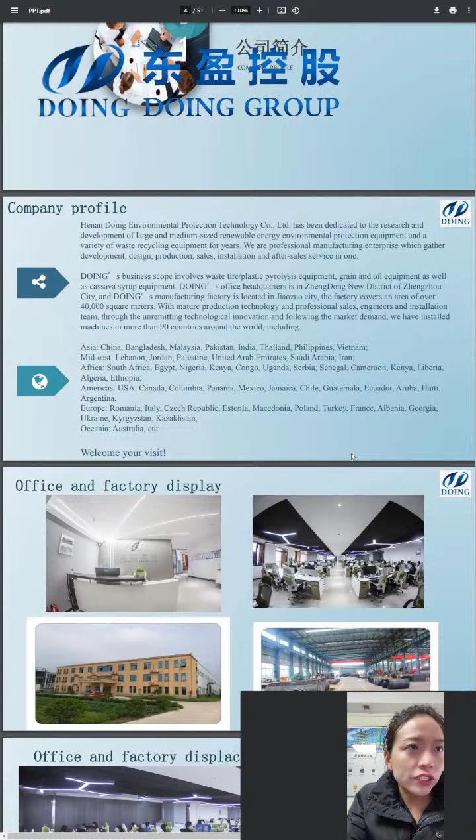We are a professional manufacturing enterprise which gathers development, design, development, design, production, sales, installation, and after-sales service in one. Our business scope involves tire and plastic pyrolysis plant, grain and oil equipment, as well as cassava equipment. Our head office is in Zhengzhou City, the capital city of Henan Province.

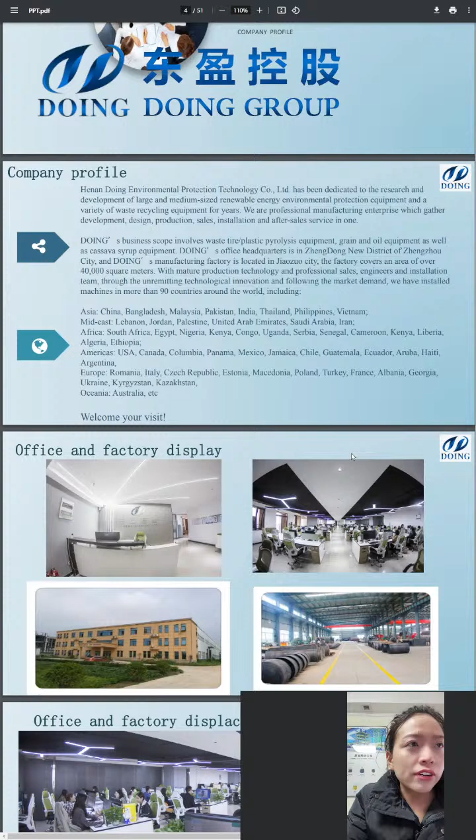It's in Zhengdong New District of Zhengzhou City, and Doing's manufacturing factory is located in Jiaozuo City. The factory covers an area of over 40,000 square meters. The whole manufacturing factory has mature production technology and professional sales engineers and installation team.

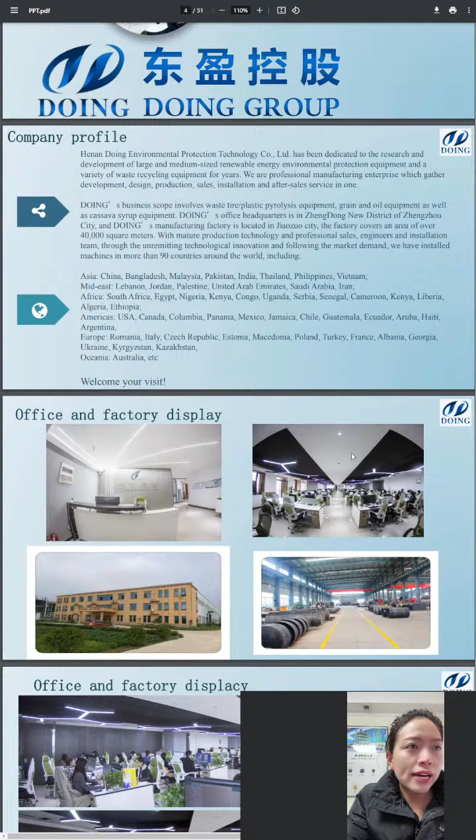Through technological innovation and following market demands, we have installed machines in different countries around the world. So till now, more than 90 countries have our projects, including Asia, Middle East, Africa, Americas, Europe.

Last year we set up a branch office in Nigeria, so you can see the market in African countries like Egypt, Nigeria, Kenya, Congo, Uganda, Serbia, Cameroon, Liberia, etc. Last year we opened a new branch office in Nigeria, so it's helpful for our foreign customers, especially for African customers.

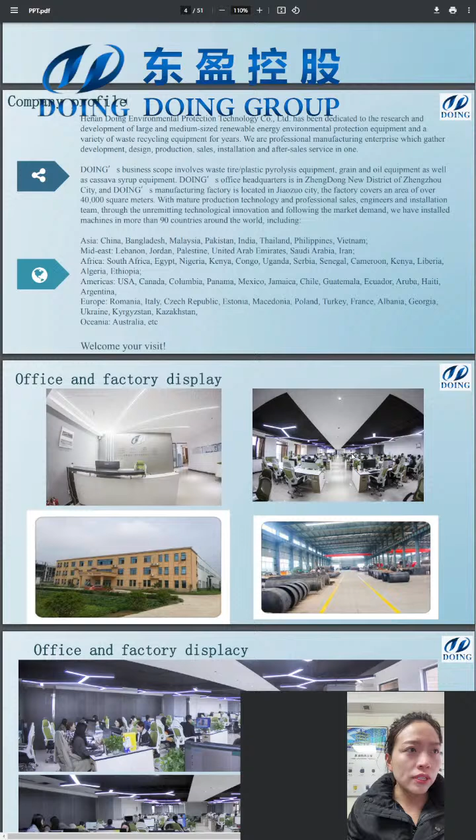So do you remember which city we are located in? Yes, we are in Zhengzhou City, the capital city of Henan Province. So it's very convenient to visit our company and our manufacturing factory. Welcome your visit.

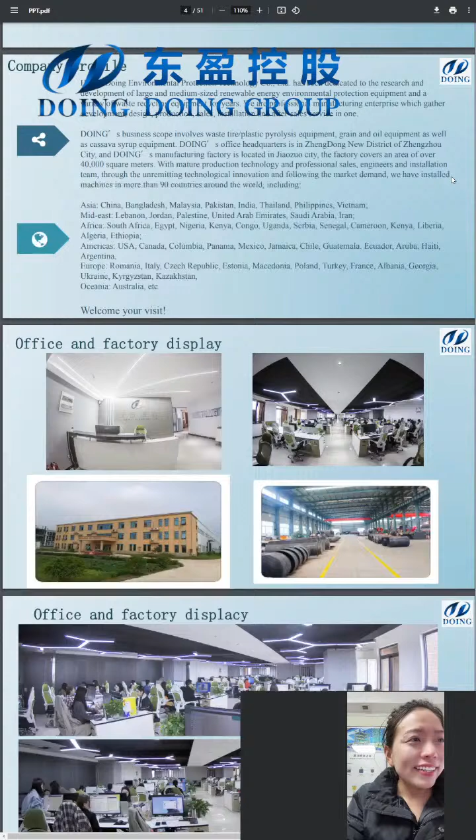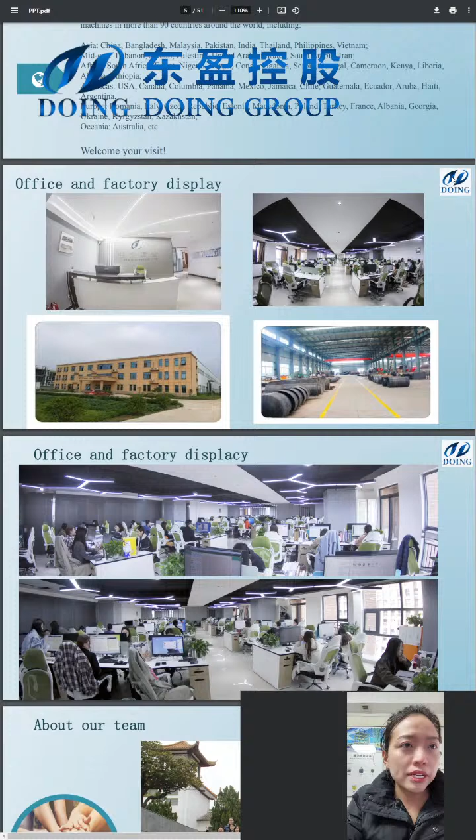Here we can see our office and factory. In our company, more than 100 staff work in different departments, like sales department, after sales department, engineering team, financial department, and management.

Our manufacturing factory is located in Jiaozuo City. It's not far from our office. Welcome your visit - when you visit us, we will show you around our company and pick you up to our manufacturing factory to see what machines we are providing and let you inspect the manufacturing quality in person.

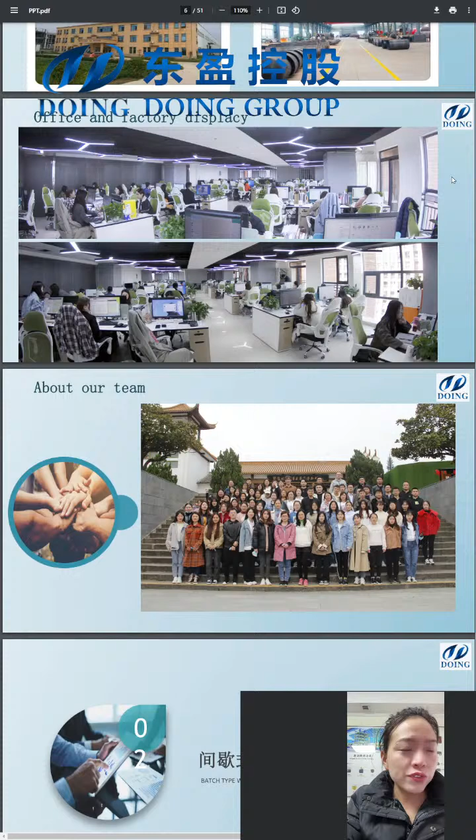In our company, there is not only work. We will enjoy ourselves in the spare time.

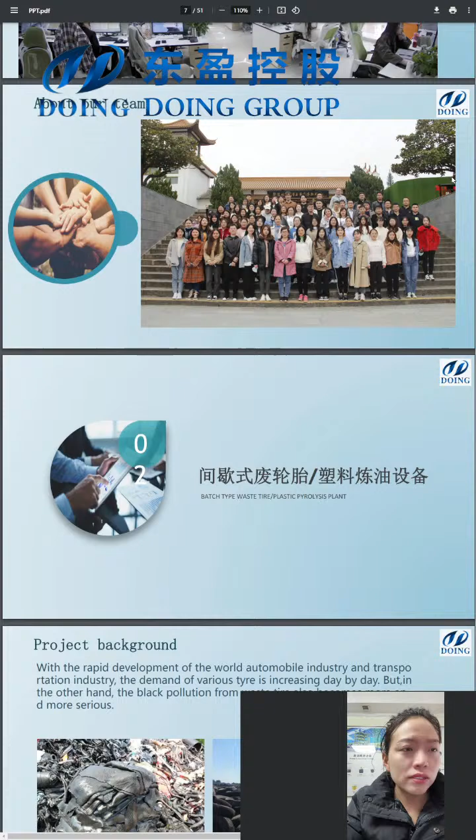Now for the main topic of this live stream: what machines we are providing and the purchase options for tire pyrolysis plant. If you research this tire recycling project, you may know some solutions or different designs of pyrolysis plant. It mainly includes 3 designs.

First one is the batch type tire pyrolysis plant. The second one is the semi-continuous pyrolysis plant. The last one is the fully continuous pyrolysis plant. For now, we are providing these 3 designs for different customers.

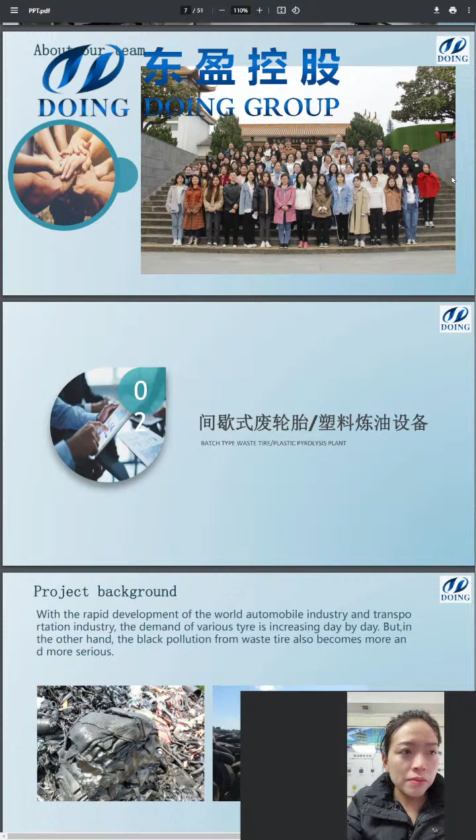If the customer's daily capacity is not very large and it's the first time for them to venture into this project, the most widely used design is the batch type. If the capacity is larger, they may choose the semi-continuous or fully continuous system.

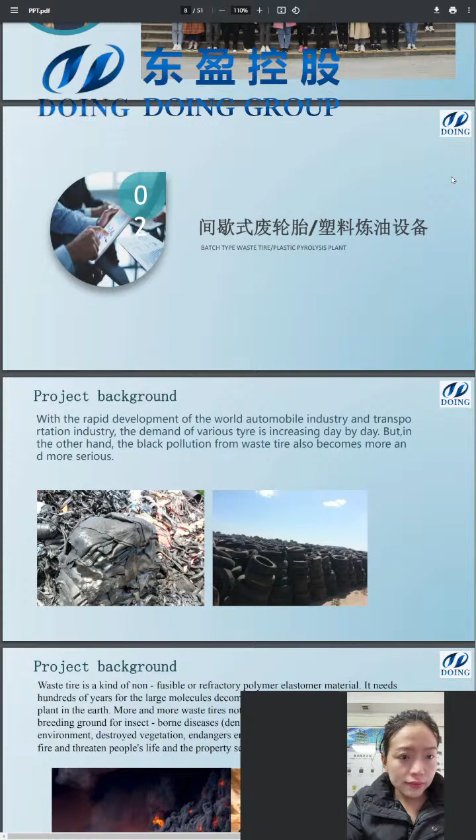Let's see the project background. With the rapid development of the world automobile industry and transportation industry, the demand for various tires is increasing day by day. But on the other hand, the black pollution from waste tires also becomes more and more serious.

So in some countries like South Africa, many customers feedback to us that countless waste tires are waiting for recycling, and they want to find a solution to dispose of the waste tire problem. That's why we appeared.

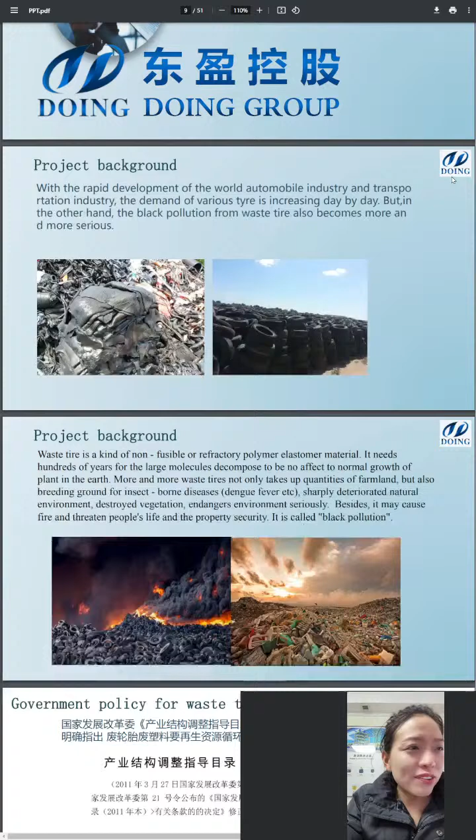The project background: waste tire is a kind of refractory polymer material. It needs hundreds of years to decompose to have no effect on normal growth of plants in the earth.

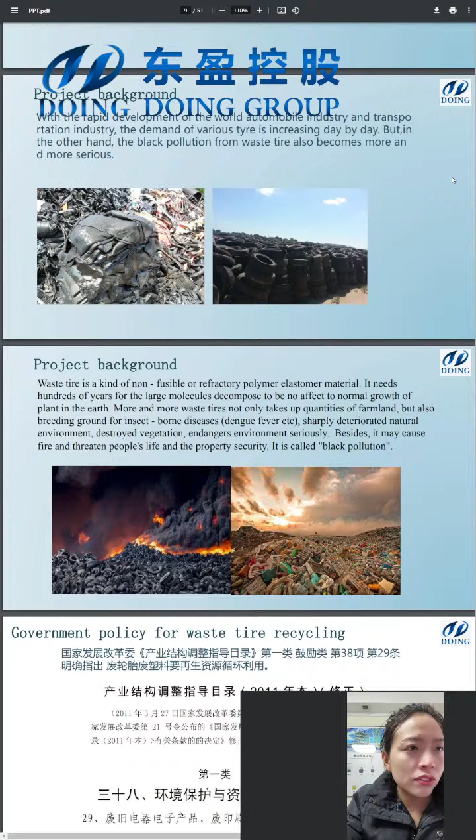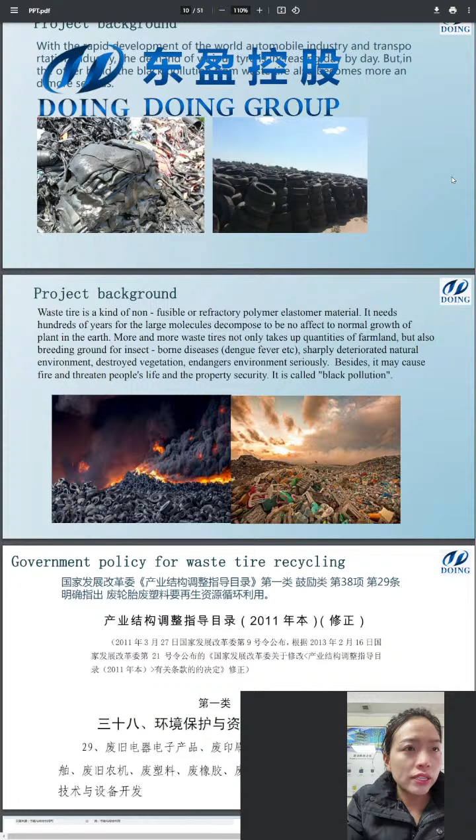More and more waste tires not only take a quantity of farmland, but also become breeding ground for insect-borne diseases, harming the natural environment. It will destroy nature and our life. It's a dangerous environment, seriously, and it may cause fire and threaten people's life and property security. That's why it is called black pollution.

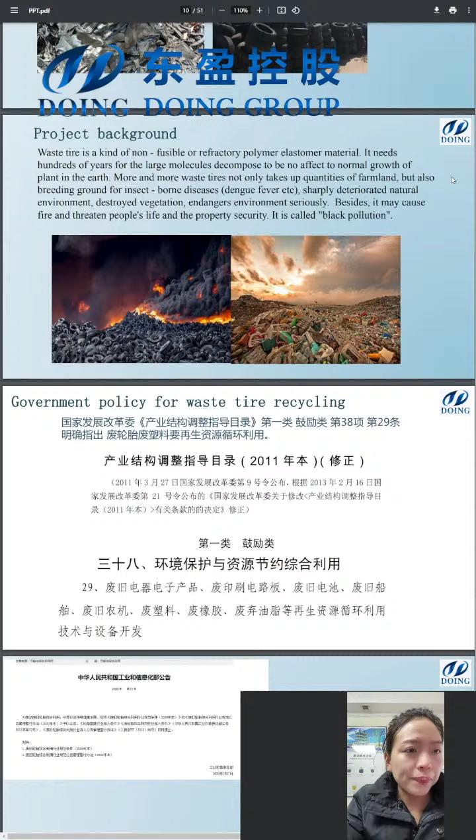Due to this problem, many countries have introduced different solutions to encourage people or enterprises to recycle waste tires properly. Like China - the Chinese government is encouraging enterprises to recycle, to do the waste tire and plastic pyrolysis project.

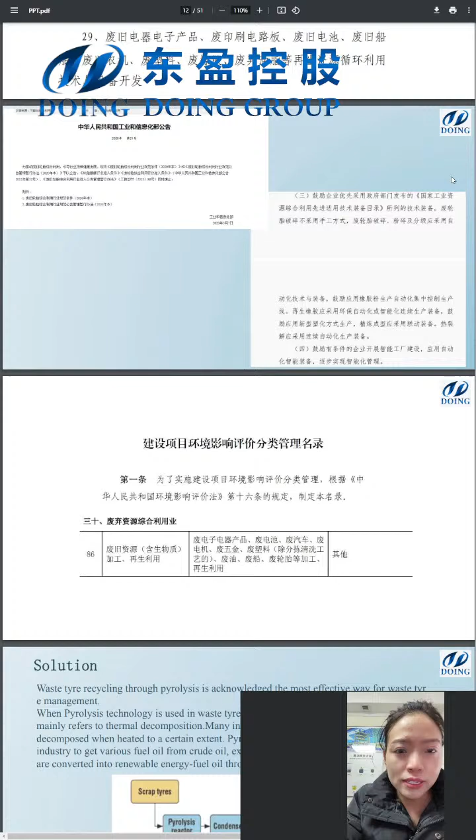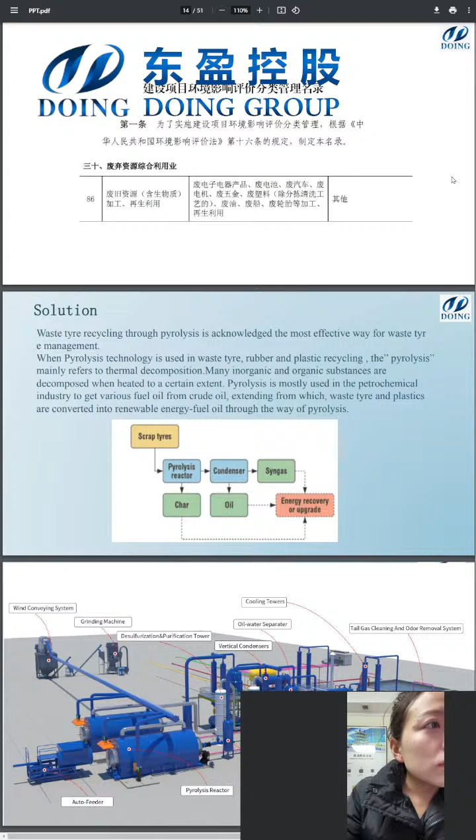Facing the waste tire problem, there are solutions. Waste tire recycling through pyrolysis is acknowledged as the most effective way for waste tire management. When pyrolysis technology is used in waste tire, rubber, and plastic recycling, the pyrolysis mainly refers to thermal decomposition - many organic substances are decomposed when heated to a certain extent.

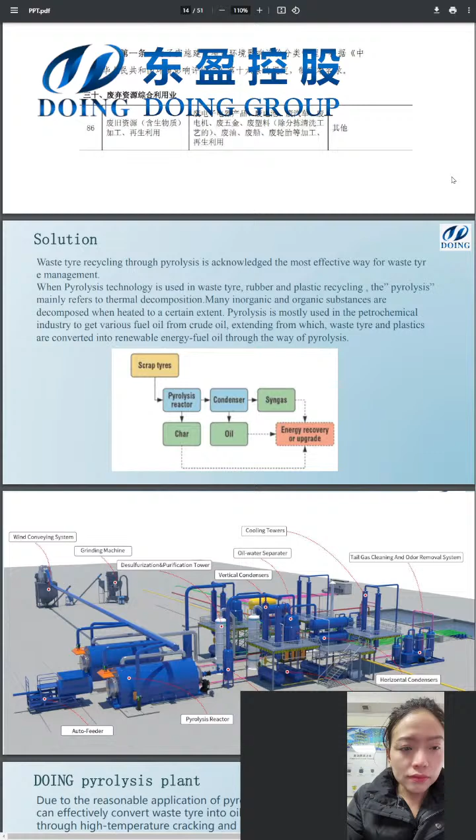Pyrolysis is mostly used in the petrochemical industry to get various fuel oil from crude oil, extending to where waste tire and plastic are converted into renewable energy fuel oil through the way of pyrolysis. In one word, waste tire pyrolysis plant can convert waste tire, plastic, and solid waste like this into fuel oil, converting waste to renewable fuel.

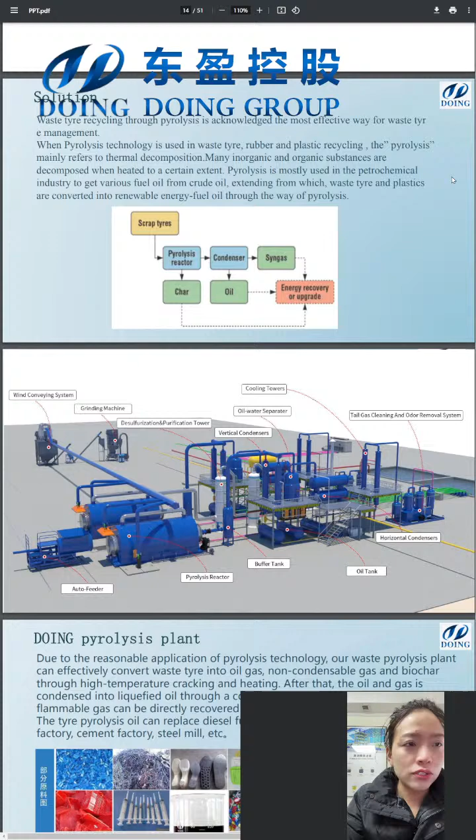Let's see the 3D flowchart of the batch design. As you know, we have three designs of pyrolysis plant: batch, semi-continuous, and fully continuous. Let's see one by one. Firstly is the batch.

Batch type is more suitable for smaller capacity. The minimum capacity is just very small, just 100 kilogram. Larger, there are 500 kilogram, 1 ton per day, 3 ton per day, 5 ton per day. And the industrial scale is 10 ton per day, 12 ton per day, 15 ton per day.

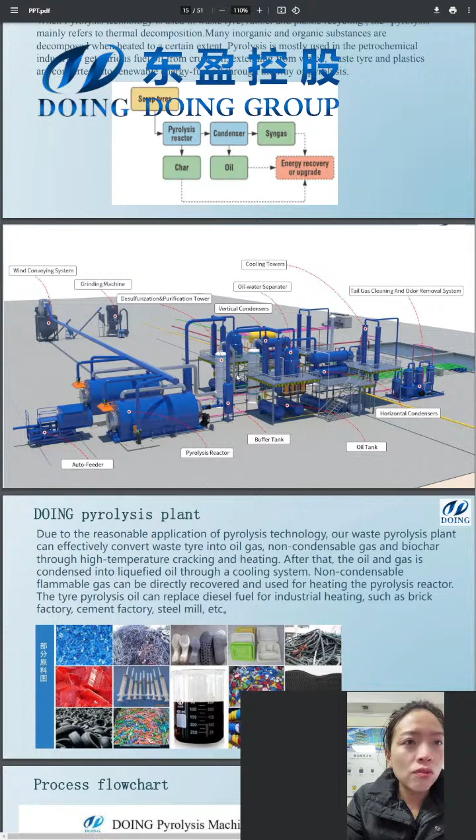And that's the 2 parts of the batch pyrolysis plant. Actually, the principle of a pyrolysis plant is a little similar, but the different designs have different technology and principle. This one is the batch type.

If customers' daily processing capacity is larger, like 20 ton per day or 25 ton per day, and they want a higher automatic degree but don't want to put a lot of investment into this project, the semi-continuous device is more suitable. Semi-continuous plant is more advanced than the batch, but cheaper than the fully continuous plant.

And the characteristic of the semi-continuous plant is the carbon black can be discharged at a high temperature. If you researched this pyrolysis project before, you may know for a batch design, before you do the carbon black discharging, you need to wait for the reactor to cool down. It will take 3 to 4 hours even with our latest batch pyrolysis plant.

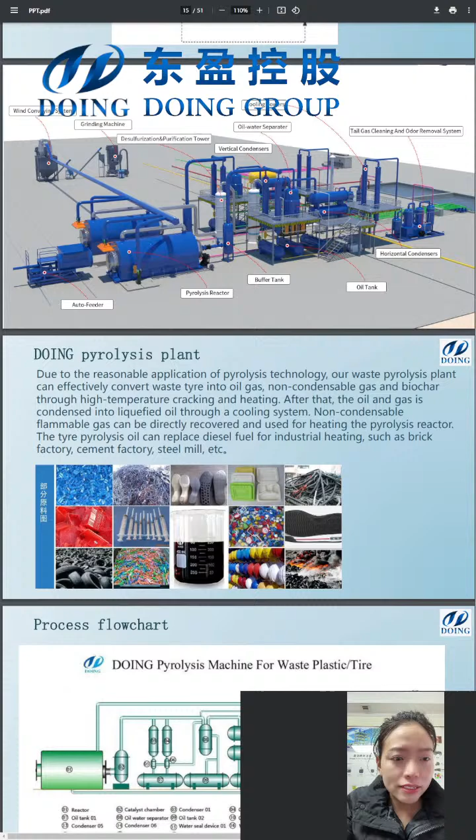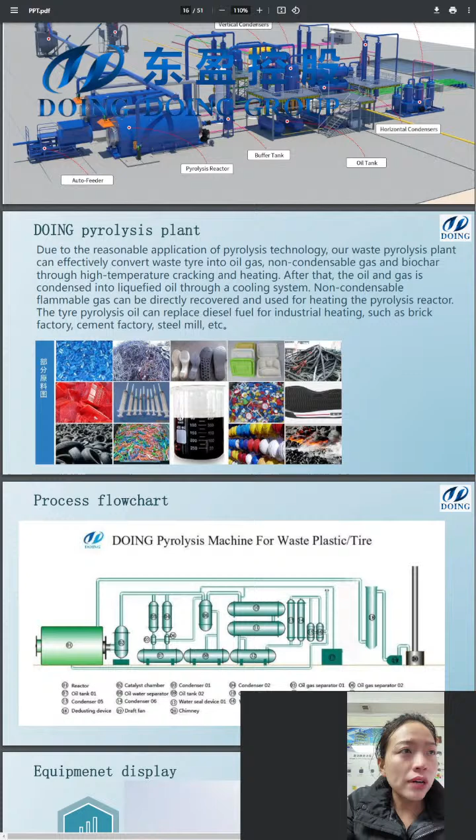Let's see what kind of material can be processed by the pyrolysis plant. Due to the reasonable application of pyrolysis technology, our waste pyrolysis plant can effectively convert waste tire into oil gas, non-condensable gas, and biochar through high temperature cracking and heating. So you will get four kinds of byproduct from waste tire. First one is the oil, fuel oil, the liquid oil.

The second one is the steel wire. Third one is the biochar or the carbon black powder. Fourth one is the non-condensable syngas. It's recycled to heat the furnace directly.

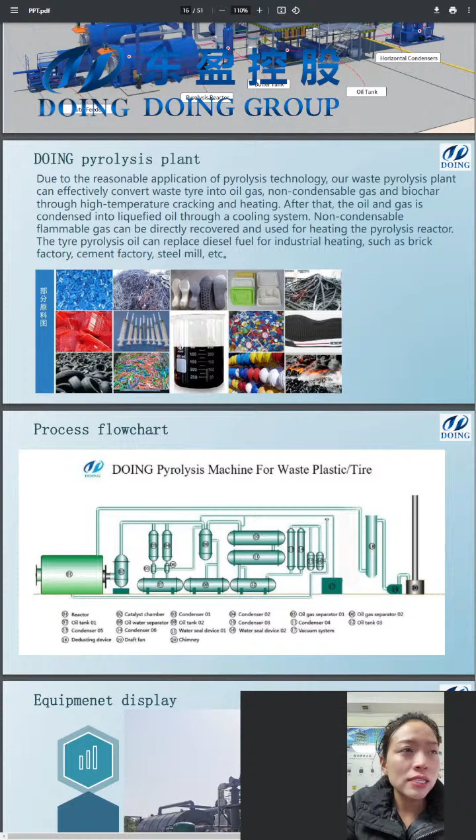After that, the oil gas is condensed into liquid oil through a cooling system. Non-condensable syngas can be directly recovered and used for heating the pyrolysis reactor. The tire pyrolysis oil can replace diesel fuel for industrial heating, such as brick factory, cement factory, steel mill, etc.

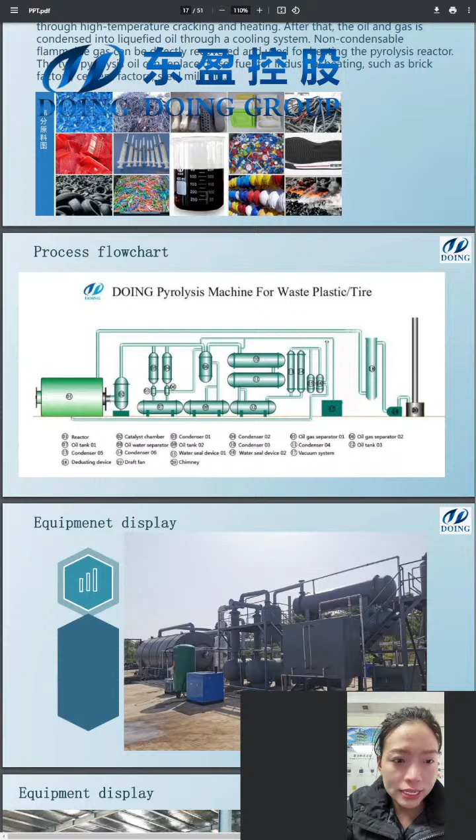It's the installation site.

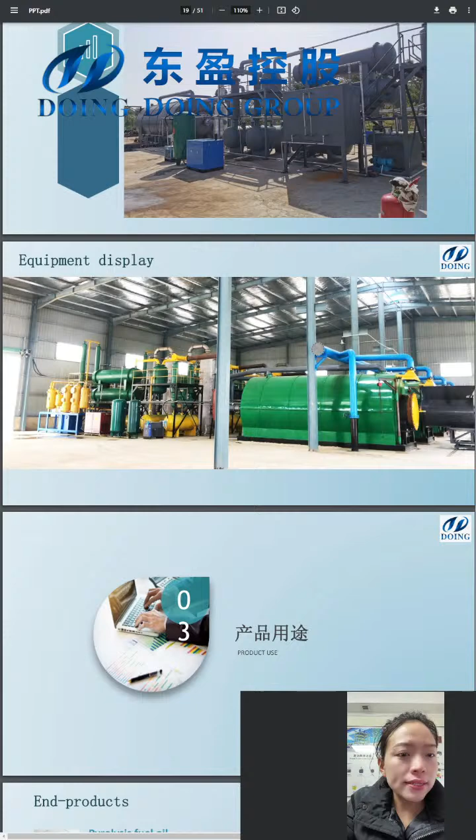Equipment display. This is one of the running sites in China. The Chinese emission standards are very strict, similar to the European standards.

To help customers reach such emission standards, we will suggest they use environmentally friendly devices like the vacuum system, automatic feeder to improve feeding efficiency, and smell disposal system to dispose of the smell of the syngas. After purification, the syngas is recovered and used for the pyrolysis reactor, as well as the desulfurization tower, which is used to remove the sulfur content of the flue gas after heating.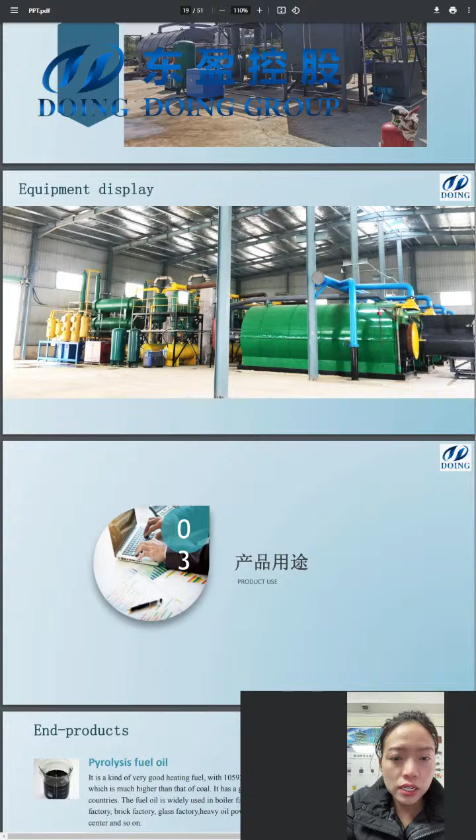Let's see the product use. Do you remember how many kinds of product you will get from tire pyrolysis? The end products are...

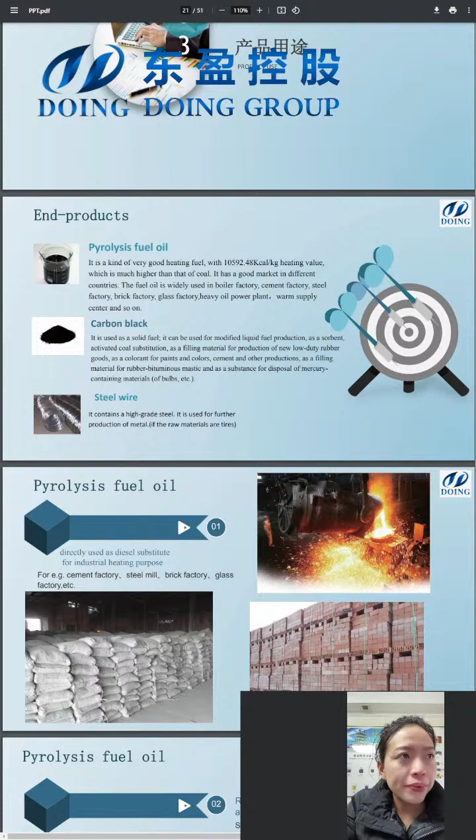First one is pyrolysis fuel oil. It's a very good heating fuel with more than 10,000 kcal per kg heating value, much higher than coal. It has a good market in different countries. The fuel oil is widely used in boiler factories, cement factories, steel factories, brick factories, glass factories, heavy oil power plants, warm supply centers, and so on. So it's one of the main products from a waste tire pyrolysis plant.

The second one is carbon black. Maybe some customers are confused about its use. They ask how they can use the carbon black or where they will sell it.

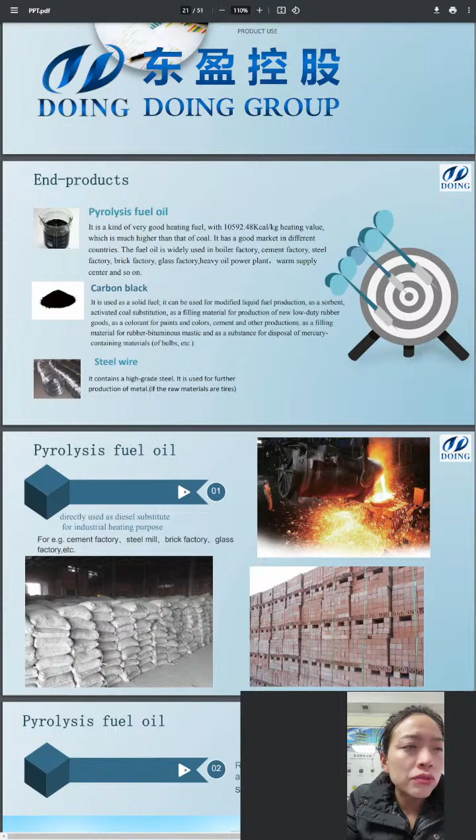It's used as a solid fuel. It can be used for modified liquid fuel production as a sorbent, activated coal substitution as a filling material for production of low-duty rubber goods, to make paints and colors, cement, and other products as a filling material for rubber-bituminous mastic, and as a substance for disposal of mercury-containing material.

As we know, from the waste tire pyrolysis project, the carbon black you get is in powder form. Maybe some customers are curious about its market. In China and India, the selling price of crude carbon black powder is not very high, so more and more customers want it to be more valuable.

So there are some solutions to process it further. If you want to make it into solid fuel, we can provide customers with the briquette machine. This machine can make the carbon black powder into pellets, so it can be transported and packed easily.

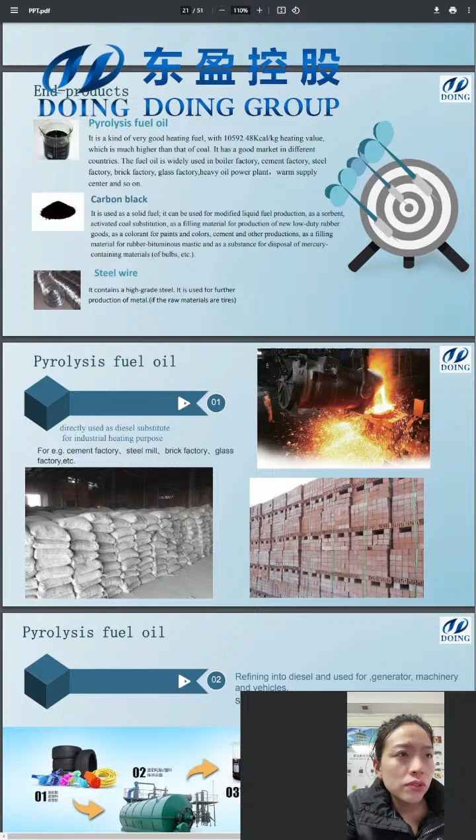So if your raw material is tires, you can get 3 kinds of byproducts: pyrolysis oil, carbon black powder, and steel wire. If you want to sell the steel wire at a better price, you can choose to remove the steel wire before feeding, so it will be of a higher grade.

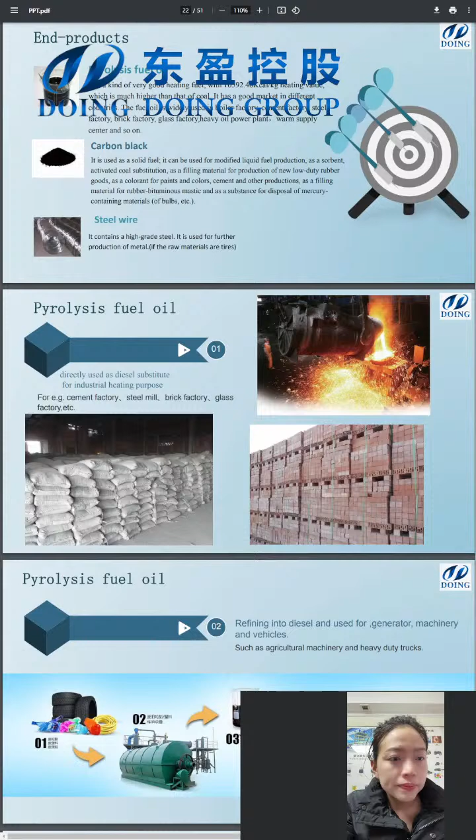Please see the pyrolysis fuel oil. It can be directly used as a diesel substitute for industrial heating purposes. Let's see where you can sell it: cement factories, steel mills, brick factories, glass factories, etc. So you can find industrial factories that use diesel fuel for heating, and sell the pyrolysis oil to them.

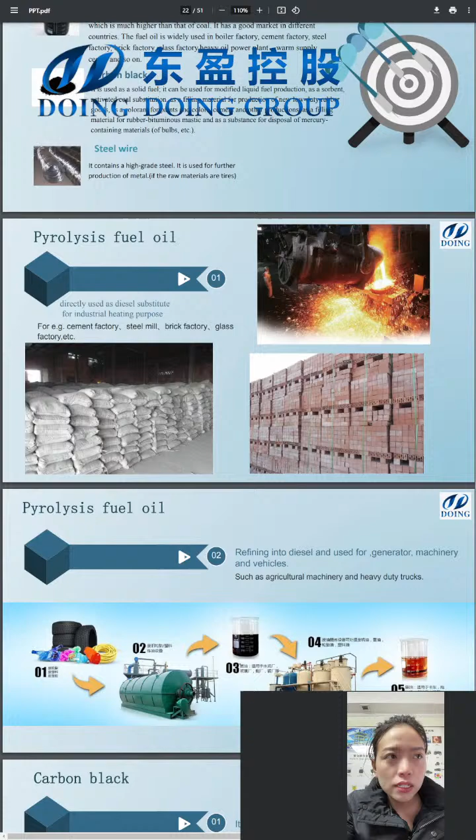There is also another way for the pyrolysis fuel oil market. The first one is you can directly sell it. The second one is you can choose to refine it.

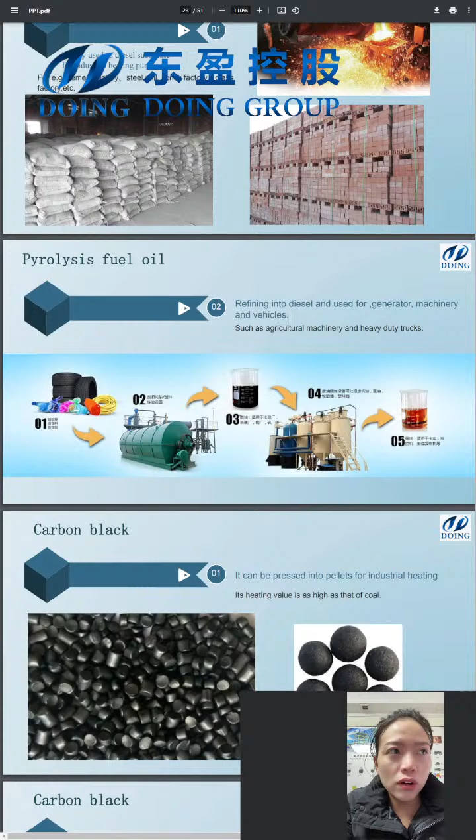Our company can provide not only the pyrolysis plant, but also the distillation unit. It can refine the tire pyrolysis fuel oil into diesel, and after this process, the diesel fuel can be used for diesel generators and diesel vehicles, such as heavy-duty trucks, agricultural machinery, like mining machines. After both the pyrolysis process and the distillation process, you will get diesel fuel. So that's the second solution to treat the tire pyrolysis oil.

After seeing the function of pyrolysis oil, let's see the function of carbon black, or how do we treat carbon black from the tire pyrolysis plant.

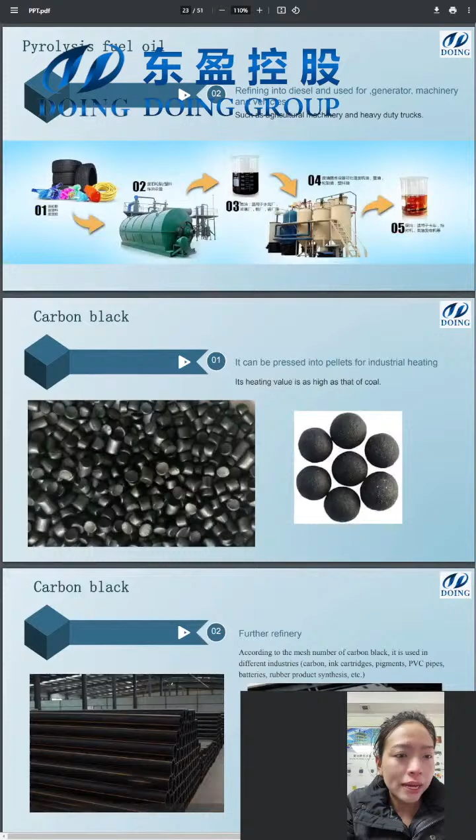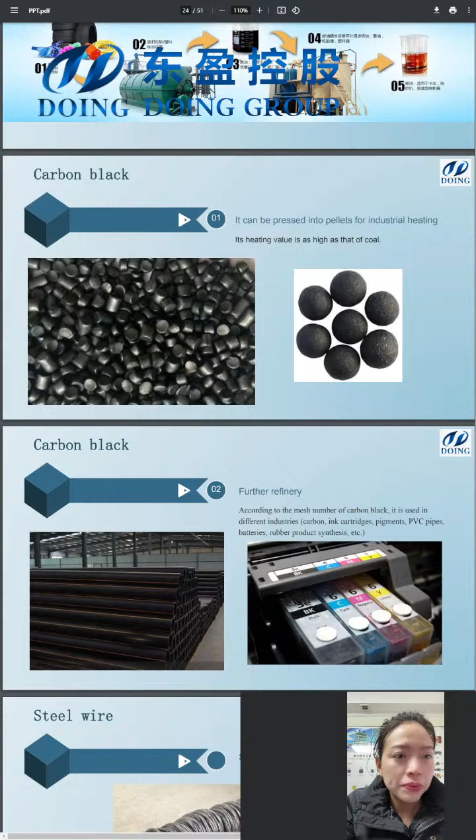The first one is, as I introduced to you just now, it can be pressed into pellets for industrial heating. Its heating value is as high as that of coal. In pellet form, it is easy to burn, easy to transport and to sell in the market, and it can be regarded as a substitute for coal.

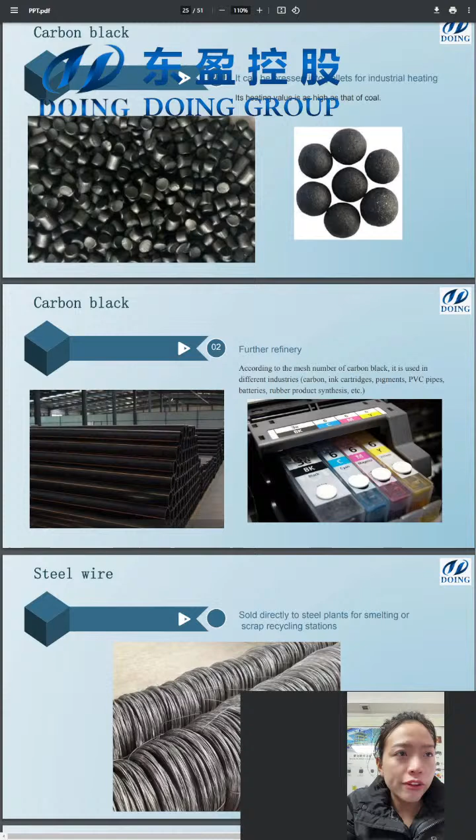The second way is further refinery. According to the mesh number of carbon black, it is used in different industries, like carbon, ink, pigments, PVC pipes, battery, rubber products, etc. In these industries, carbon black is very important.

So if you are new to this project and you don't know how to find the market, you can refer to this introduction and look into these industries to see if they need such products from the waste tire pyrolysis project.

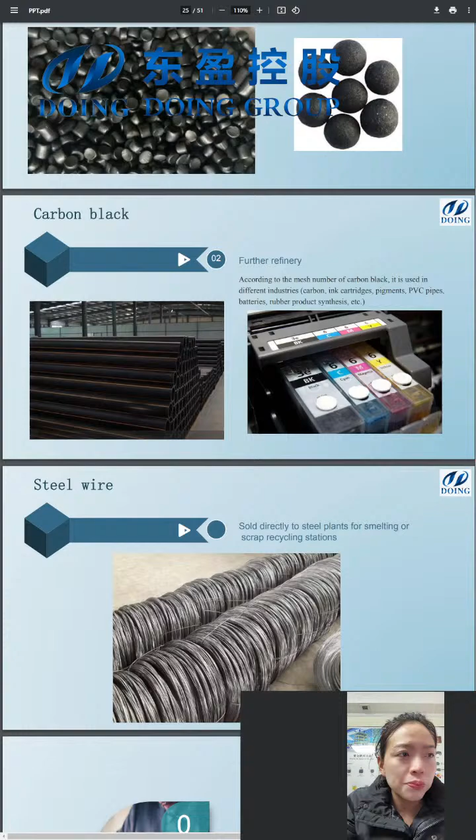The third one is steel wire. Steel wire can be sold directly to steel plants for smelting or to scrap recycling stations. And if you would like to get a higher grade steel wire, you can use the steel wire separator to remove the steel wire inside the reactor with the tire. In this way, without extra heating, the steel wire quality is better.

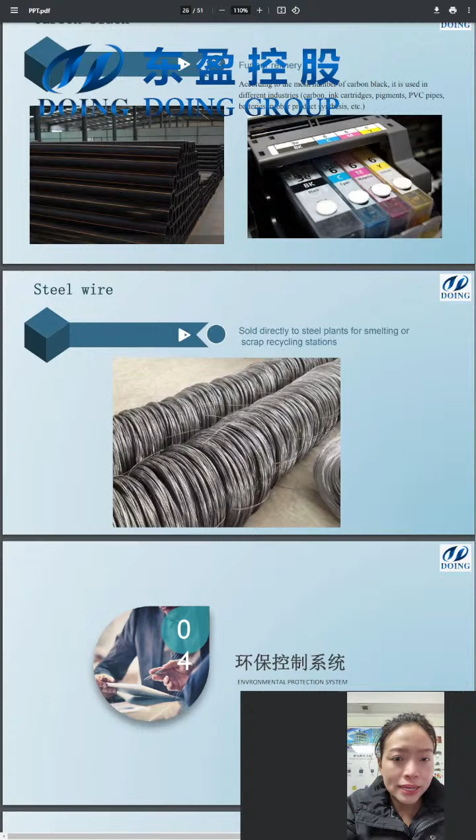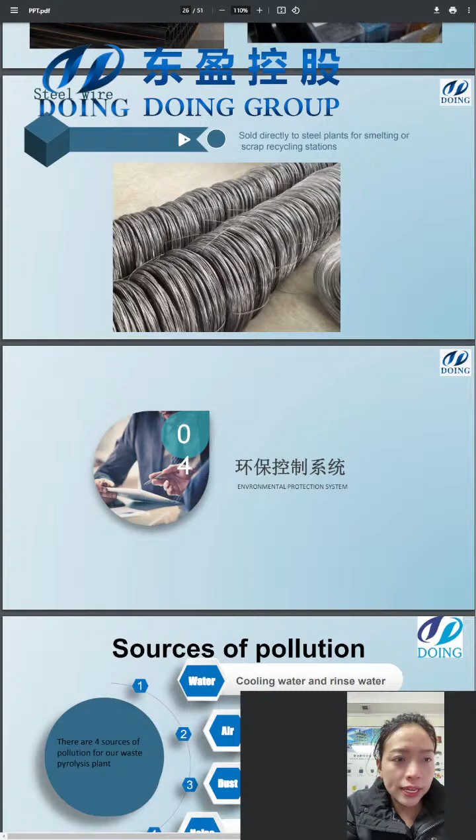After seeing the functions of the byproducts from waste tire pyrolysis plants, let's see how we achieve a higher degree of environmental protection, and in which aspects we can help customers get better and higher emission standards.

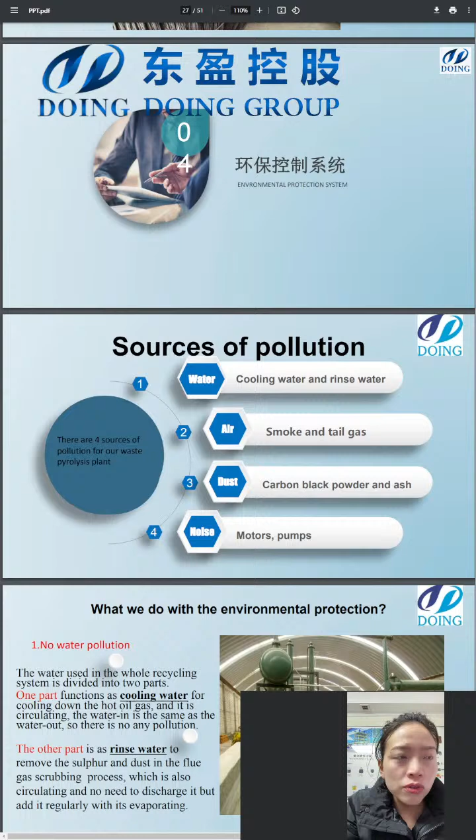Maybe some customers want to ask how do you guarantee this plant has no pollution, and how do you solve the pollution problems? Firstly, we must know the source of pollution and what aspects would cause pollution issues.

There are 4 sources of pollution for our waste pyrolysis plant. The first one is water, the second is air, the third is dust, and the fourth is noise. Let's analyze them one by one.

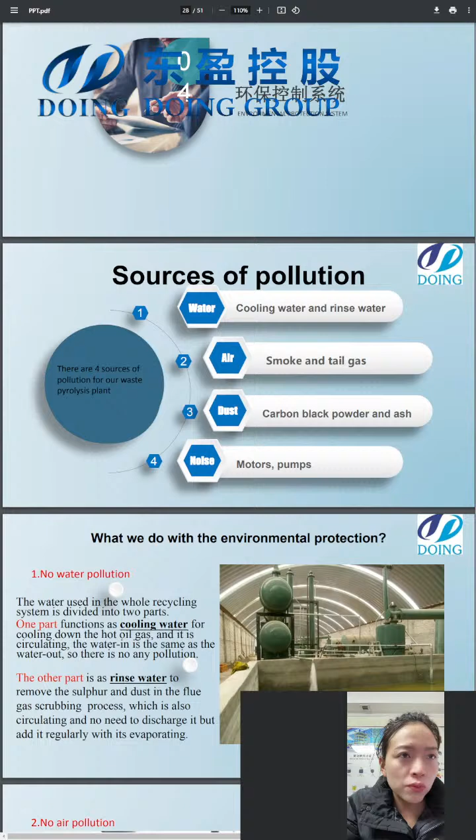Water: in Doing's pyrolysis plant, the water used contains 2 kinds. One is cooling water, the other is rinsing water. And we tell customers our plant is without water pollution.

Let's see why. The water used in the whole recycling system is divided into 2 parts. One part functions as cooling water for cooling down the hot oil gas, and it is recycling, it's circulating. The water in is the same as the water out, so there is no pollution - that's the cooling water. The second water is the rinse water, used to remove the sulfur and dust in the flue gas scrubbing process, which is also circulating and doesn't need to be discarded, just added regularly as it evaporates. So you can see there is no water pollution.

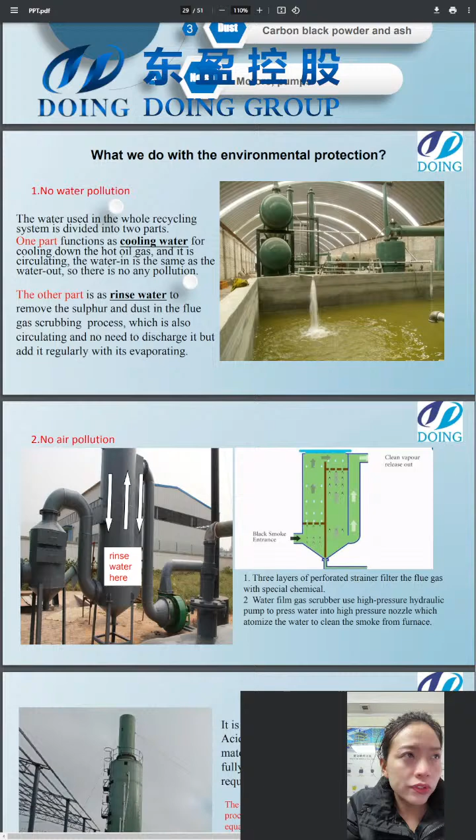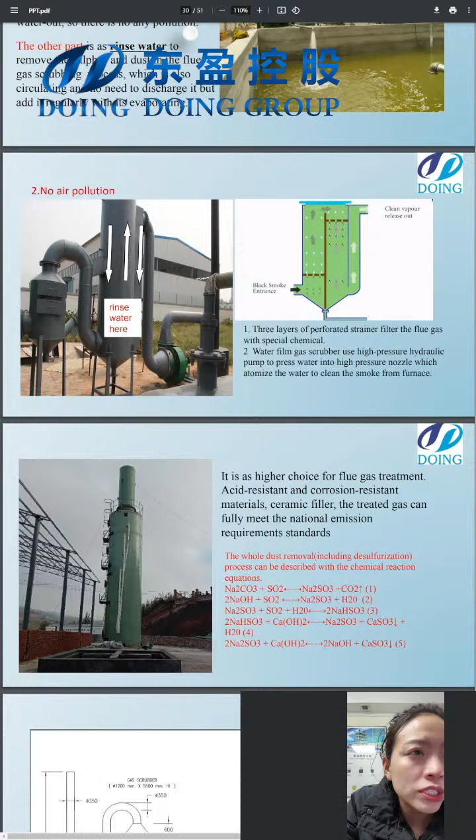Second one is the air. Let's see why there is no air pollution. Firstly, there are 3 layers of screens that filter the flue gas with special chemicals, and the water film gas scrubber uses a high pressure hydraulic pump to press water into a high pressure nozzle, which atomizes the water to clean the smoke from the furnace.

It's the basic configuration. If you are located in African countries and you don't need to care about emission standards very strictly, this configuration is okay, it is enough to reach the emission standards.

But if you are located in a country with higher and more strict requirements on emissions, or you want a more environmentally protective device, you can use this higher configuration: the FRP desulfurization tower. It is a higher choice for flue gas treatment, with acid resistance and corrosion resistant material, using ceramic filler.

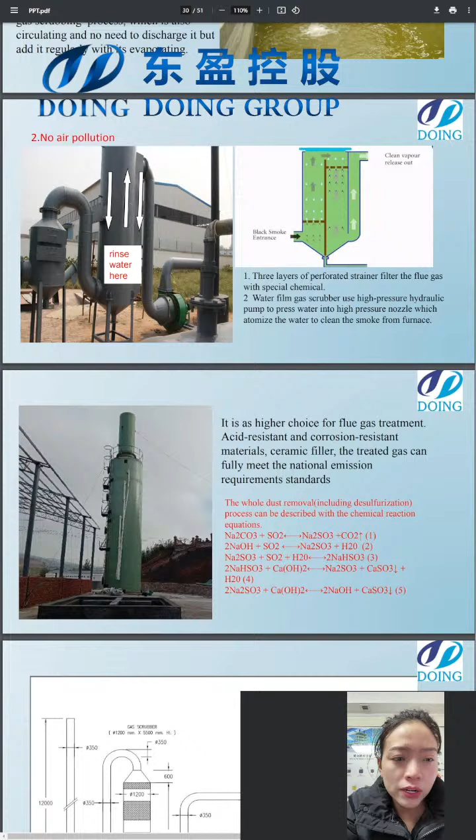The treated gas can fully meet the national emission requirement standards. Not only can it meet the national emission standards, it can also reach the European, USA, and other countries' very strict emission standards.

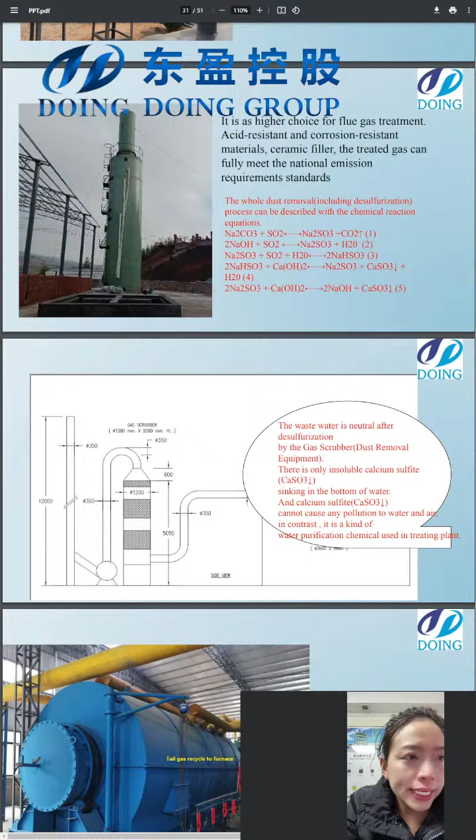If you are familiar with pyrolysis or with the chemical industry, you can understand the chemical reactions involved, so please have a look roughly - it's the structure inside the scrubber. By using special chemicals to remove the sulfur content of the flue gas, after purification, the flue gas can be discharged, can be emitted to reach the standards.

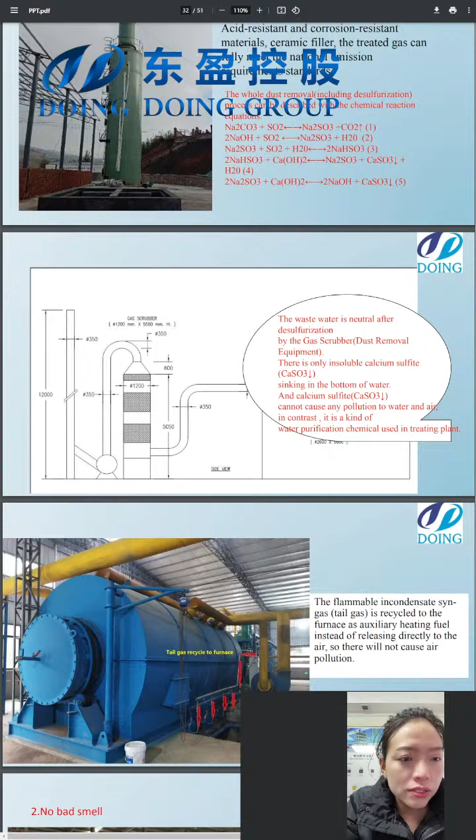The tail gas is recycled to the furnace as auxiliary heating fuel instead of releasing directly to the air, so there won't cause air pollution.

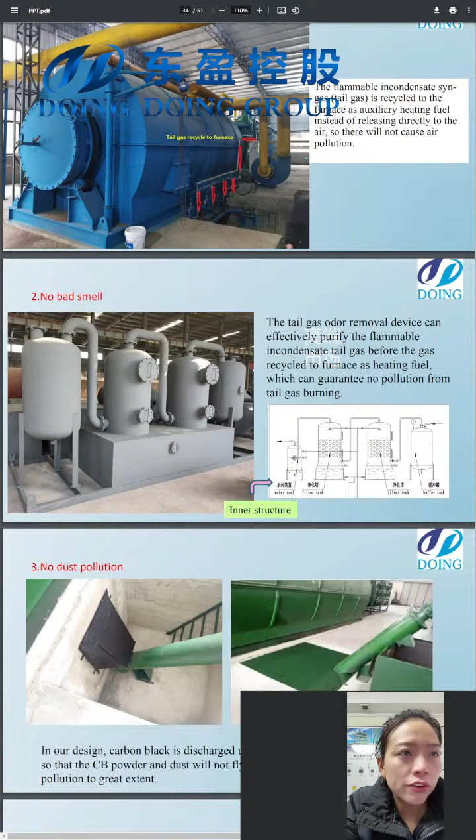Let's see the smell, how to dispose of the smell in the flue gas and the tail gas. It is one of our patent products. The tail gas odor removal device can effectively purify the tail gas before the gas is recycled to the furnace as heating fuel, which can guarantee none of the pollution from tail gas burning.

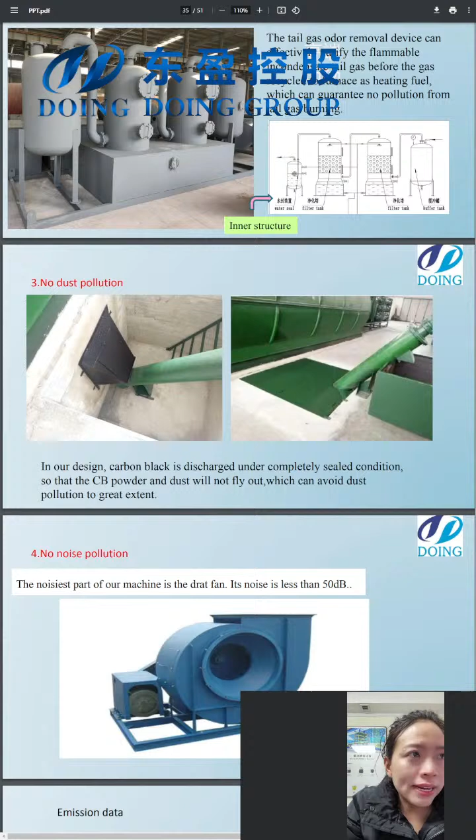It's the gas problem. Let's see the dust problem. As we can see, the carbon black, this photo is for the carbon black discharging process of the batch device. In our design, carbon black is discharged under completely sealed condition, so that the carbon black powder and dust won't fly out, which can avoid dust pollution to a great extent.

It is the design of the batch system. If you choose the semi-continuous or fully continuous plant, that's why we say these two designs are much more costly than the batch device. The one of the biggest differences is the carbon black discharging process.

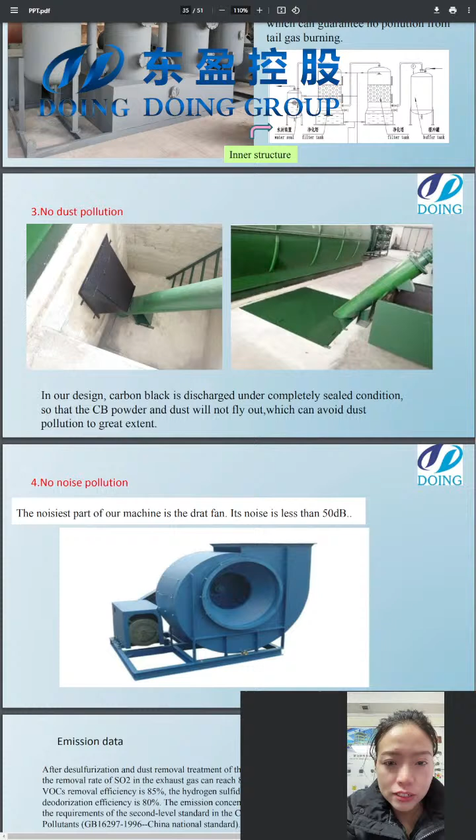In the semi-continuous and fully continuous pyrolysis plant, the carbon black will be discharged by the discharging conveyor. All the conveyors are sealed, and no matter the feeding process or the carbon black discharging process, the powder form is in a completely sealed condition, so as to avoid the dust flying situation.

So we analyze the dust pollution, what we do to prevent the dust problem.

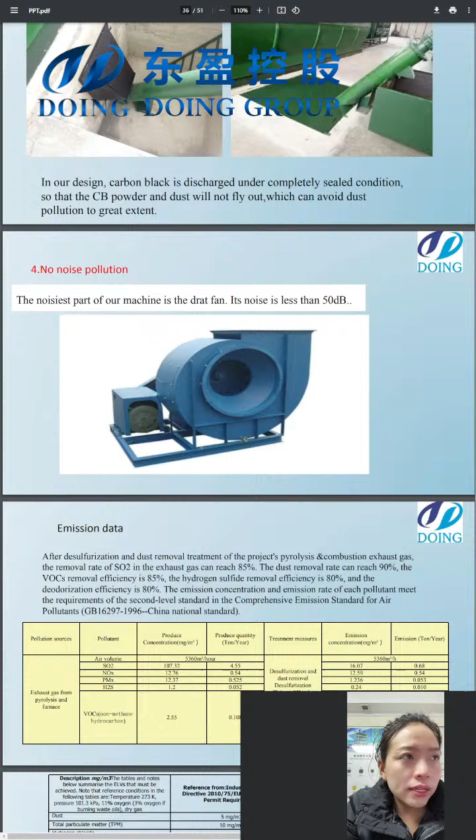And the last one is noise pollution. The noisiest part of our pyrolysis plant is the draft fan, its noise is less than 50 dB.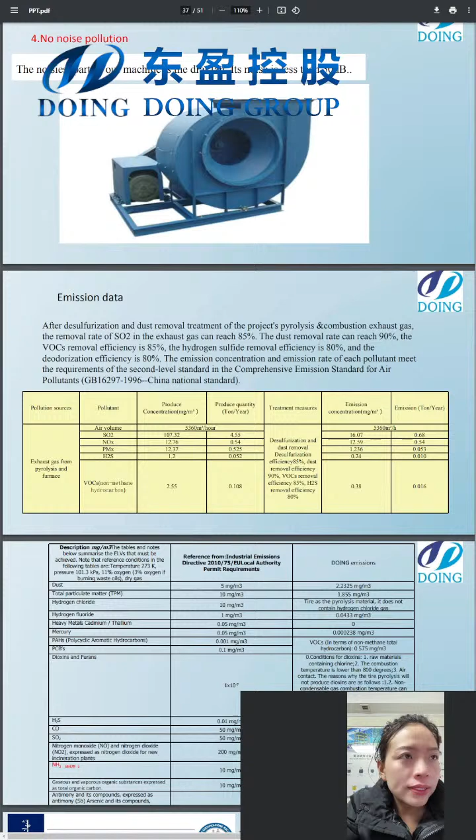No matter which aspect you look at, we have corresponding solutions or plans to help you reach the local requirements.

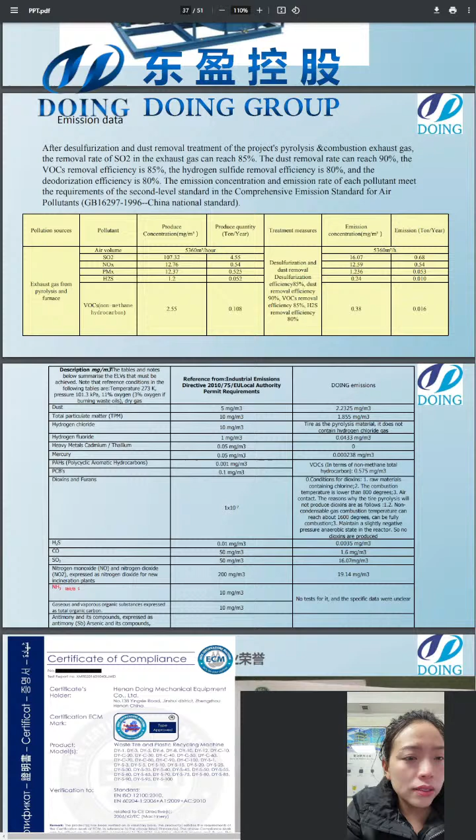It's the emission data of one of our installation sites. Maybe it is not very clear to see the specific data. If you are curious about it, you can leave your number, and our sales managers will contact you to introduce its specifications.

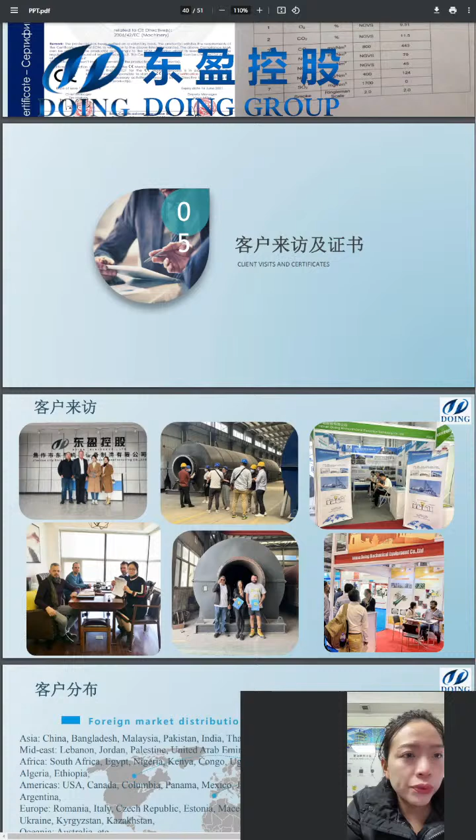When customers visit us, we will leave photos, and when we participate in exhibitions, we meet a lot of foreign customers who are interested in this project. Last year we got a lot of orders from developed countries, and now a set of fully continuous pyrolysis plant with PLC control is under production in our manufacturing factory. Just today, we tested its running situation in our factory, and all parts are running successfully and smoothly.

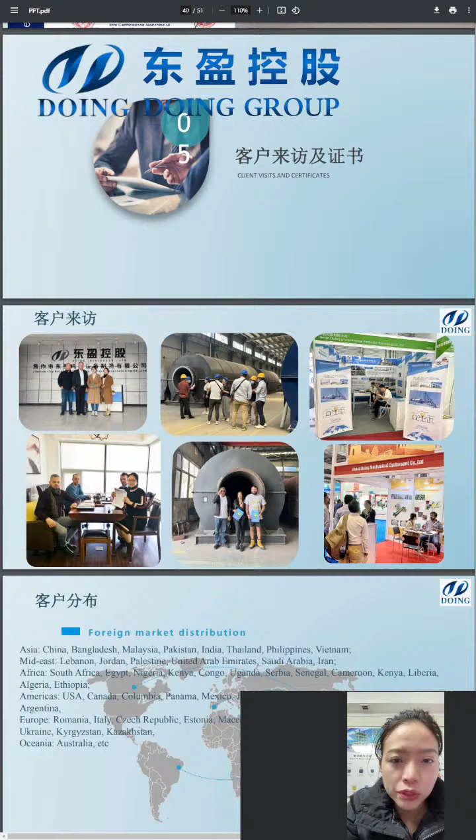If you would like to see how it works, please contact our sales manager. We will introduce and send you the running videos.

Let's see the foreign market distribution. As I introduced, we have installed pyrolysis plant, distillation unit, grain and oil machine, and cassava recycling machine to more than 19 countries around the world.

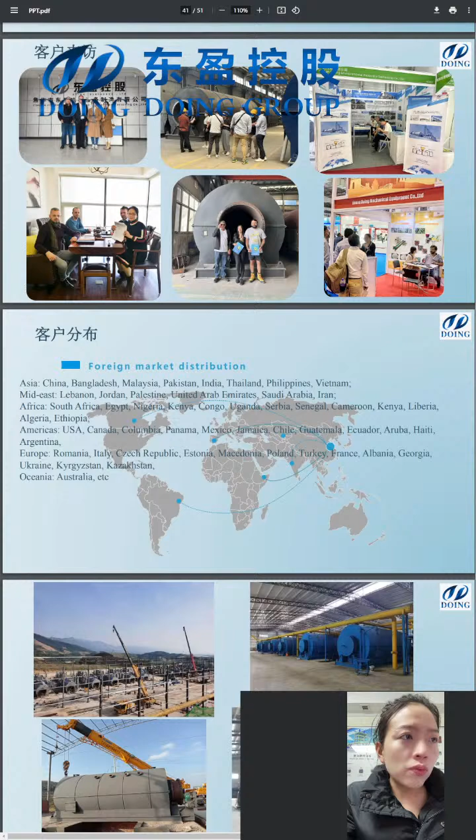In Asia: China, Bangladesh, Malaysia, Pakistan, India, Thailand, Philippines, Vietnam. In the Mid East: Lebanon, Jordan, Palestine, UAE, Iran, Saudi Arabia. In African countries: South Africa, Egypt, Nigeria, Kenya, Congo, Uganda, Serbia, Senegal, Cameroon, Liberia, Algeria, Ethiopia, and right now we have a branch office in Nigeria.

If you are living in African countries or near Nigeria, welcome to visit our branch office.

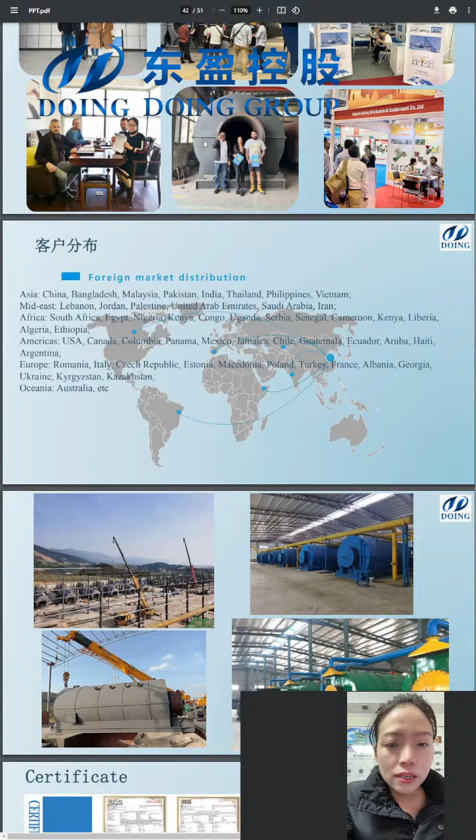Besides the branch office, we have bought a piece of land to build our own manufacturing factory in Sagamu, Nigeria. So it is more convenient for our foreign customers to pick up auxiliaries from our Nigeria warehouse, or we will produce our own equipment or auxiliaries in the Sagamu factory. It will save some shipping cost for our African customers.

As for the Americas: USA, Canada, Colombia, Panama, Mexico, Chile, Guatemala, Ecuador, Haiti, Argentina.

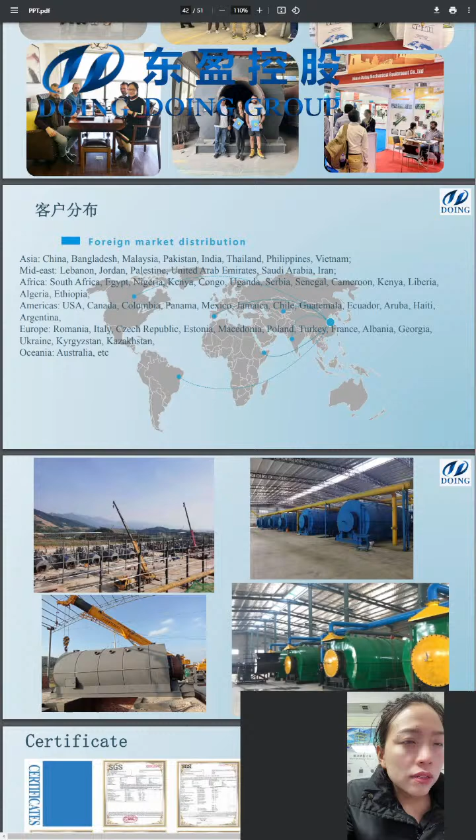And European countries, as we all know, the European emission standards are very strict. Even so, we have installed many plants in European countries, such as Romania, Italy, Macedonia, Poland, Turkey, France, Ukraine, and Albania.

The certificates we have obtained include CE certificate, ISO certificate, and some patent certificates. We applied for patents on our pyrolysis plant, such as the smell disposal system I introduced to you, and the special design of the fully sealed carbon black discharging conveyor applied for the fully continuous pyrolysis plant.

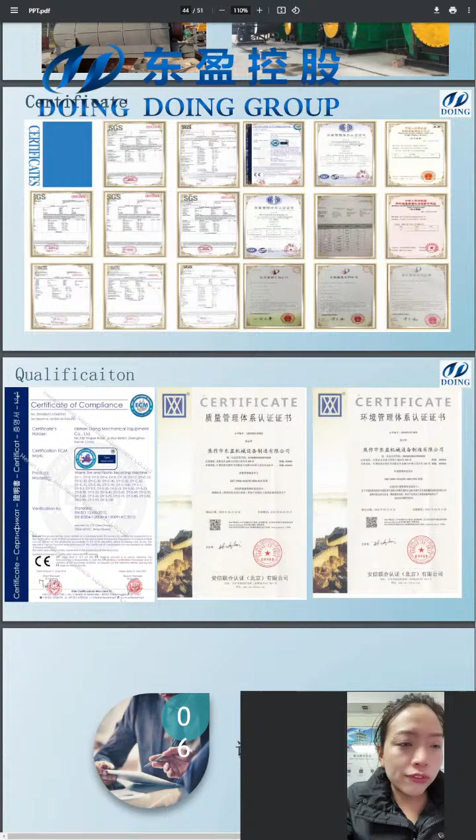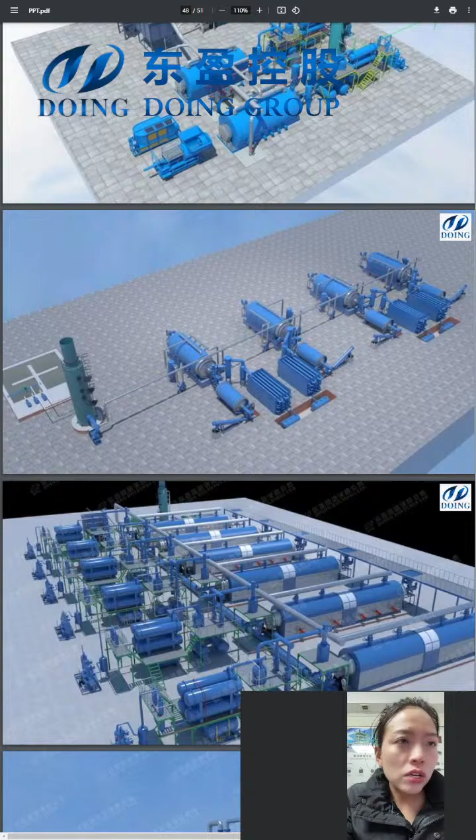Let's see the 3D layout drawing: 2 sets of batch pyrolysis plant, 4 sets of cooling water tank cooling system equipment. This is the semi-continuous plant. And the last one is the fully continuous plant.

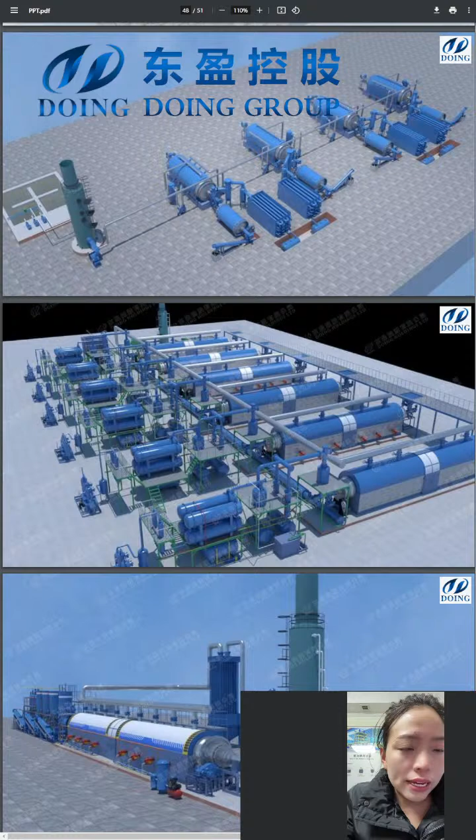We are providing different types of waste tire pyrolysis plants to reach different demands of different customers. If your daily capacity is larger, the semi-continuous and fully continuous plants will be more suitable. If you would like to test its feasibility first and expand in the future, our batch plant would be the best choice.

We can also help you make the layout as per your actual land, to help you know how to place our plant and how to make the drawing.